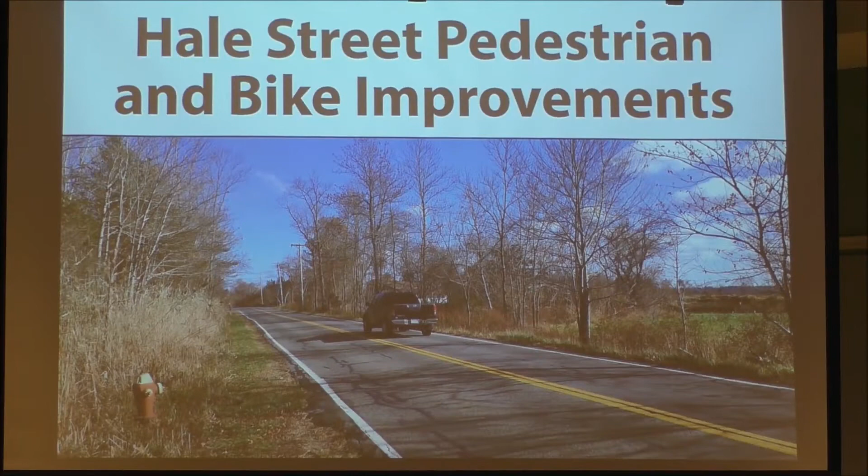You all probably know the road much more than I do, especially its problems, but just looking at a map, you can see that Hale Street is one of only two ways to get into the downtown, and it's really the only potential walkable, bikeable route to get to the downtown and the schools from the west end. This is the area we're looking at: basically 1.7 miles from Turkey Hill Road at the bottom of the map to Low Street at the top.

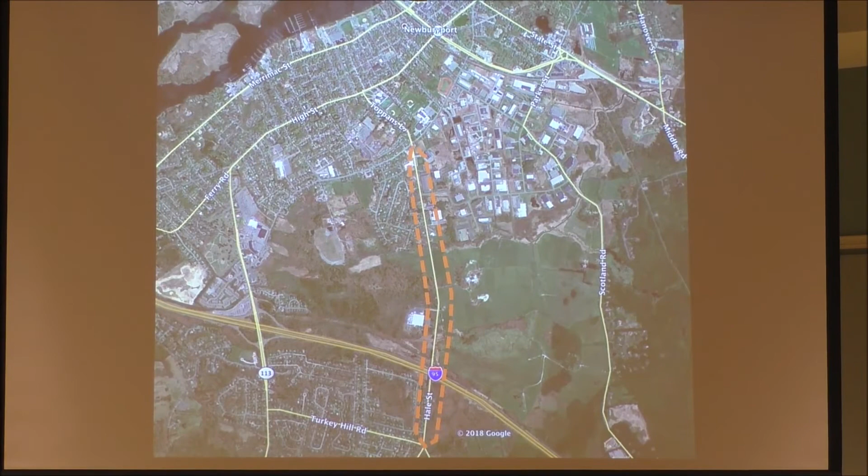One of the interesting things is we have this developing network of trails in the four-town coastal trails area. The system includes off-road trails, shown in blue, and possible on-road bicycling routes. You can see on this map that Hale Street is the way to get from the west end into the downtown area. Obviously, we're not going to promote Route 113 as a primary route, especially for kids.

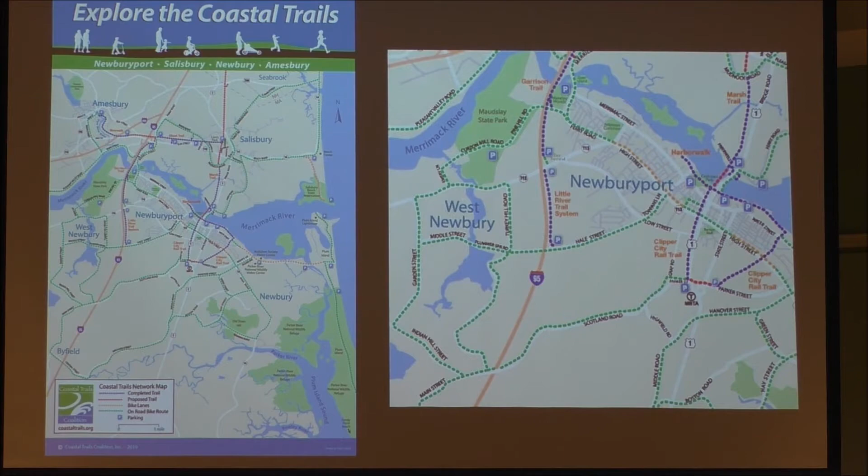The route has a real variety of environments, going from the residential neighborhoods on the west side of 95, through the farmland area by the industrial park, through the Squires Glen neighborhood, up toward the school and Fuller Field here on Low Street, which are really primary attractors for going down that road.

I'm just going to take you through a very quick run-through from Google Earth and Google Street View, just kind of highlighting some of the issues along the road.

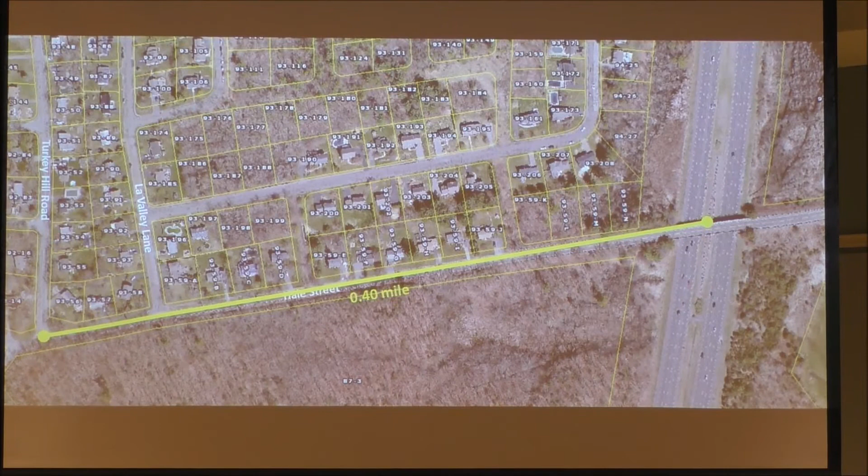The first section is the 0.4 mile stretch from Turkey Hill Road to the bridge over 95. This is the only area that really has a significant amount of sidewalk. It begins with the sidewalk separated from the street with some nice trees. However, the road has really no infrastructure at all for bicycling. It's constrained on the south side by the guardrail and the ditch, so whatever happens here needs to account for infrastructure in that area and how you deal with the guardrail and the ditch. I believe John Eric is going to be talking about that.

As you move closer to 95, the sidewalk gets closer to the street. It's pretty narrow, very constrained by guardrails on both sides. You get up to the bridge, and that's really the best part of the road, the bridge going across 95, because you actually have a sidewalk with a curb, some shoulder, and wider lanes. So it's really the best part in terms of walking and bicycling.

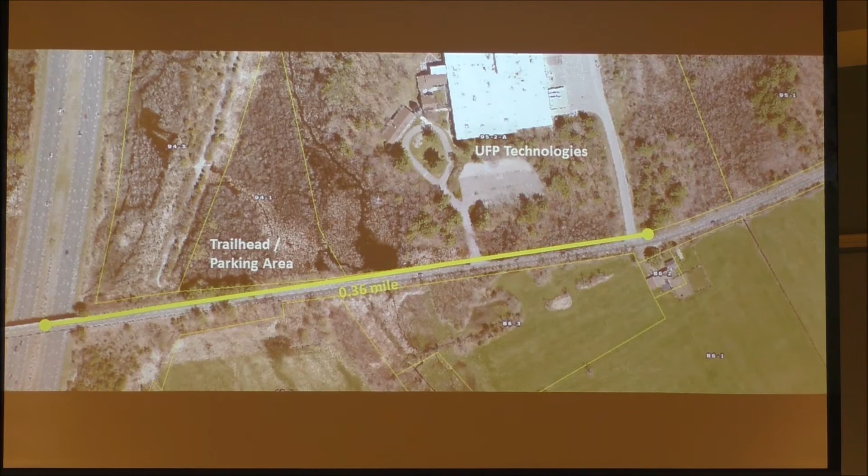Then as you cross the bridge, you come to the trailhead for the Gloria Brownhart Trail and the driveways for UFP Technologies, another roughly 0.4 miles. The sidewalk starts to get overgrown, and then the sidewalk disappears.

You get narrower and narrower shoulders. You've got the constraint of the pond on the north side, some wetlands on the south side. You have concern perhaps about trucks entering and exiting the industrial property.

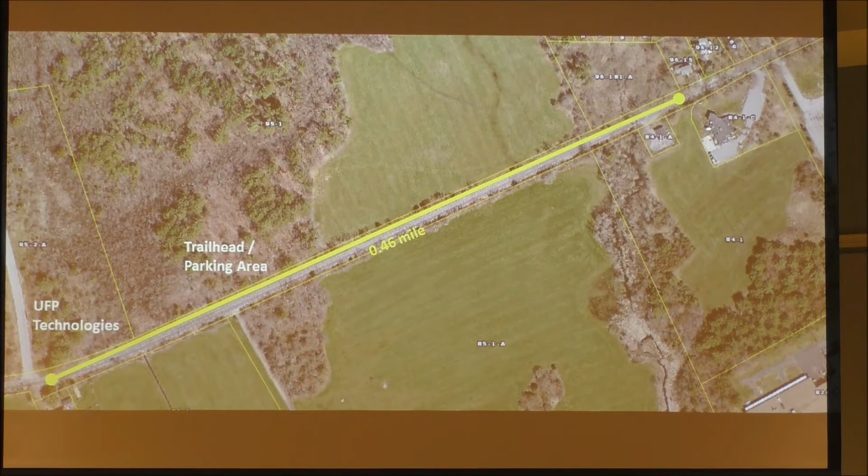You've got a new trailhead and parking area, which isn't shown in this old image here. You've got the recreational conservation area of the North Pasture. All the way up, there's very few constraints in this area relative to some other areas, until you get to the residential areas up by Squires Glen subdivision.

Like you're coming along here, and you get any kind of traffic in this area, there's really no place to move. So it's a place to be careful about. Very narrow shoulders, very beautiful, very nice country road, but very little space to maneuver as a bicyclist or a walker.

And then this next section, now we're getting into smaller sections. There's a quarter-mile section here as we go through the Squires Glen neighborhood, up to the point of the beginning of the sidewalk, just past Squires Glen Drive.

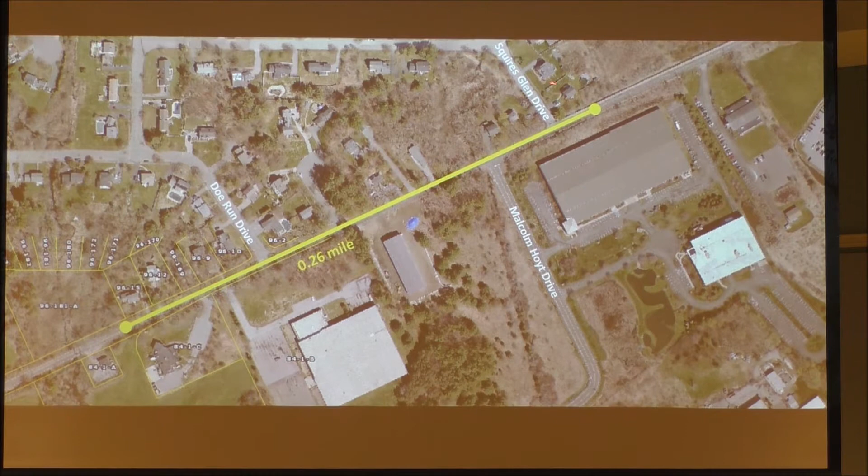So again, we have multiple driveways here. This is an area where there are many school kids in the neighborhood, so an area that would be highly deserving of a better sidewalk infrastructure through here.

And then getting to the industrial park. I think that this is the point at which the traffic counts really pick up, because you have a lot of traffic that is destined to the industrial park or to I-95 via Scotland Road, that kind of adds to the traffic from this point toward Low Street.

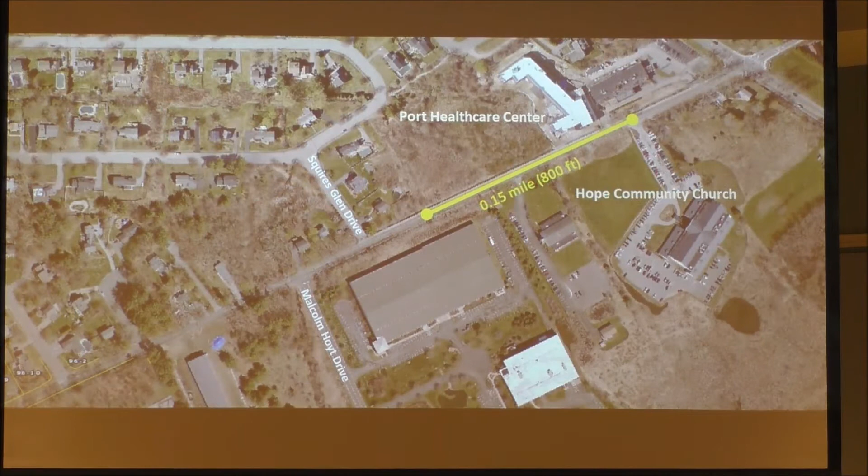And then we come to the end of Squires Glen neighborhood, and we pick up that sidewalk. Another small section here from where the sidewalk comes up to the Port Healthcare Center and the Hope Church. Wetlands again on the north side, wetlands on the south side.

And then that very last area where you've got traffic backed up from the signal and so forth, and quite a lot of traffic in this area. Bring you right up to the corner, and the crosswalk takes you over to the schools.

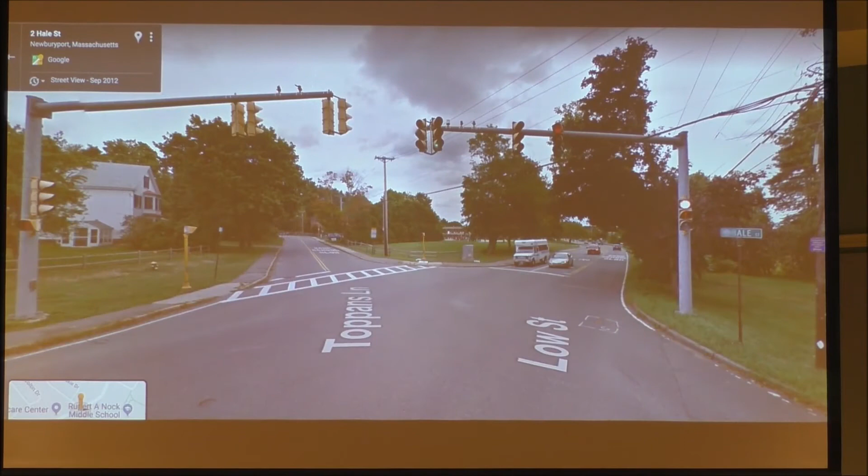So that's just a very quick overview, and now I'll ask John Eric to come up and do his thing.

You guys been talking about this? Oh, no, you haven't. Thank you, sir.

As the mayor was saying, I put this slideshow together during one of our ad hoc committee meetings in 2018. The slideshow itself is rough and tumble, it's quick, but it gets the point across. So we used, just like Rick, we used Google Earth for the street view, and it becomes very effective.

What I'm going to talk about, I just did the first bullet. I'm going to go into the existing conditions real quick, mainly about the road width. It's all about the road width. I'm going to run the Mass DOT design standards by you for those that aren't familiar with Mass Highway standards, Mass DOT standards. Then we're going to discuss some proposed options, and then we're going to open it up. I'll turn it back over to Rick.

So Rick approached it from the west to east. I approached it from the east to west because I wanted to get home, and that's kind of how my brain thinks. So, but I do live on Crow Lane, so I live in your neighborhood. So this project, I'm not going to excuse myself from any meetings. I'm going to be a proponent of it. I really am in support of it, in favor of it. We really need it. Outside of where I live, in my professional position here as city engineer, we need it.

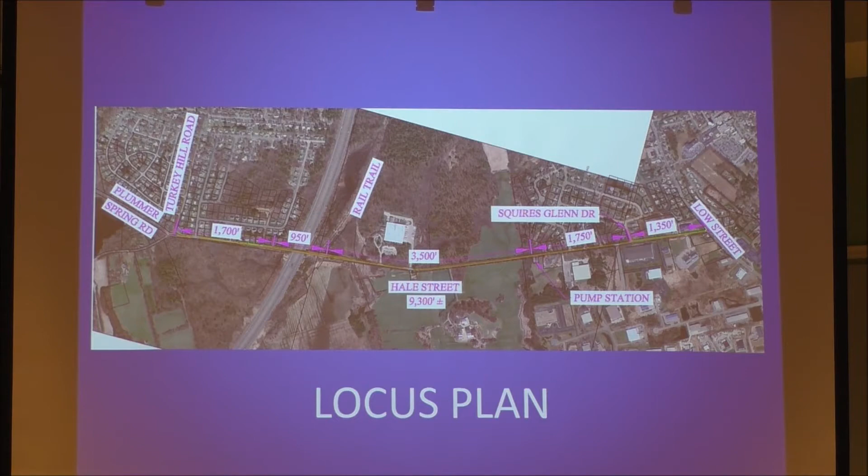The first area is more urban. Then you get Squires Glen - technically the traffic engineers call it a village area, but it becomes a transition between more urban and then you get into rural. Then you go back to a kind of developed rural. So this short stretch, it's not a very long road, it's 1.5 miles, but you do have 3 different cross sections. You talked about the access points.

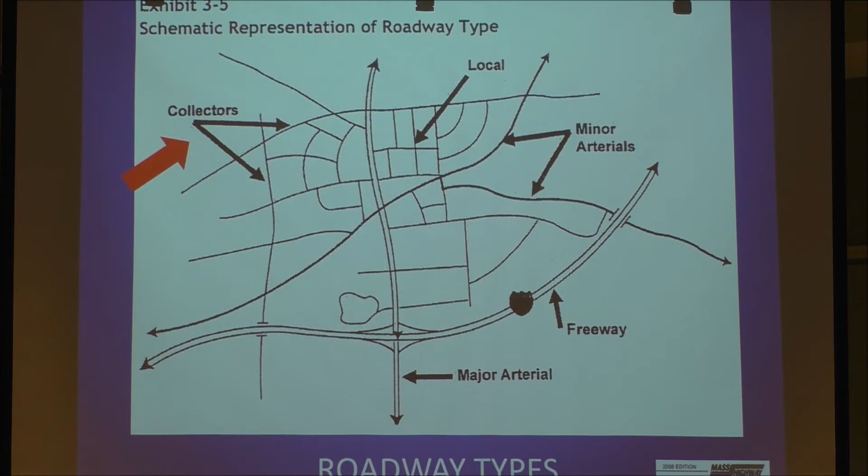So when it comes to highway design, I'm a general civil engineer by trade. I've done plenty of highways, but I'm not a traffic engineer. A traffic engineer deals with numbers, ADT, traffic counts and all that. But I've had enough experience with highway design, so I'll run that by you real quick.

This is Hale Street, a collector. You start off leaving your house locally - this slide is almost exactly like Newburyport. Like I'm right here, this is local, you jump on Hale Street, and then you might jump on Low Street. So Low is like a minor arterial, but Hale is a collector.

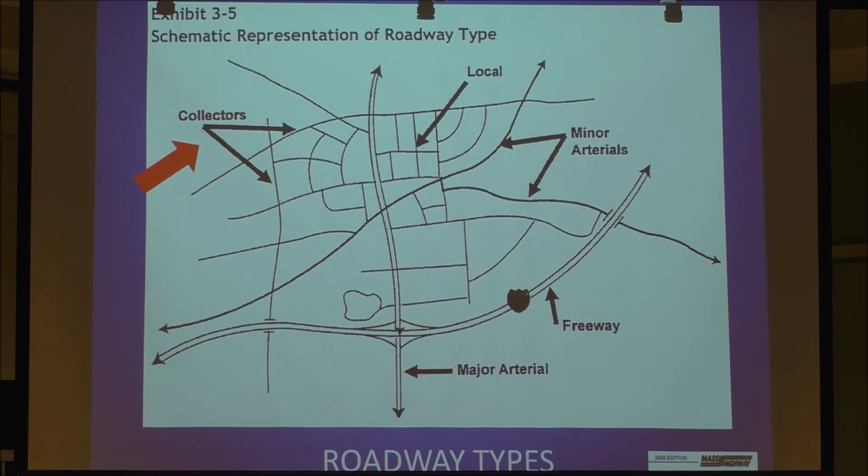And for each one of these classifications, Mass DOT has requirements for widths and all that fun stuff. Enough to bore you - this is one of them right here. This is in case you didn't know it - what's the width of my car?

Your car is probably about 7 feet wide. This is actually accurate for my car. Tractor trailers are 8.5 feet. And the operating width - if you look at the operating width, 8.5 feet plus a foot on each side only gives you a 10.5 foot lane. So when you start talking about lane widths, when you get down to really narrow lanes like 10 feet, that gets sketchy.

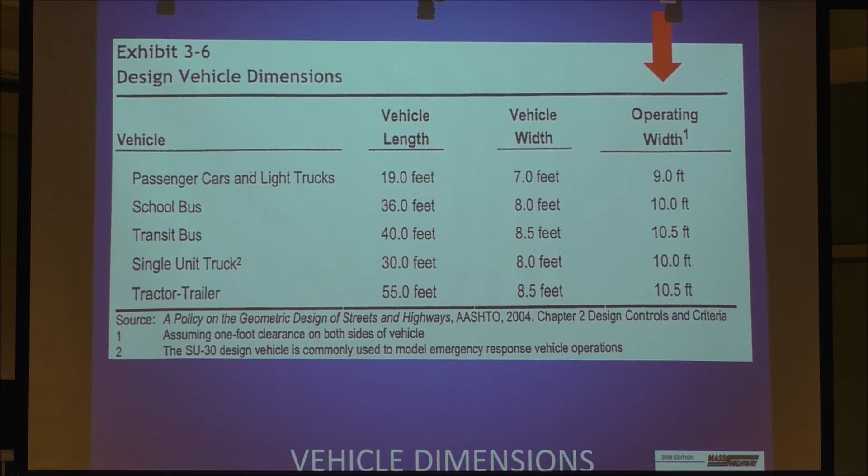So for this collector road, I don't want to go anything lower than 11 feet, and we can talk about that. So technically, Mass DOT allows you - here are the different types, the different types of neighborhoods. Collectors are all 10 to 12 feet.

If this was funded by Mass DOT, which it could be, Mass DOT gives you the ability - they have the minimums and maximums, and they give you the ability to design as you see fit.

For our road, the first section going into the industrial park has tractor trailers, so we do not want 10 feet. I don't like 10 feet for the whole thing, and we're going to get into that - you'll hear my opinion about that as it goes. So I'm going to try to have everyone in the audience concentrate on an 11-foot minimum.

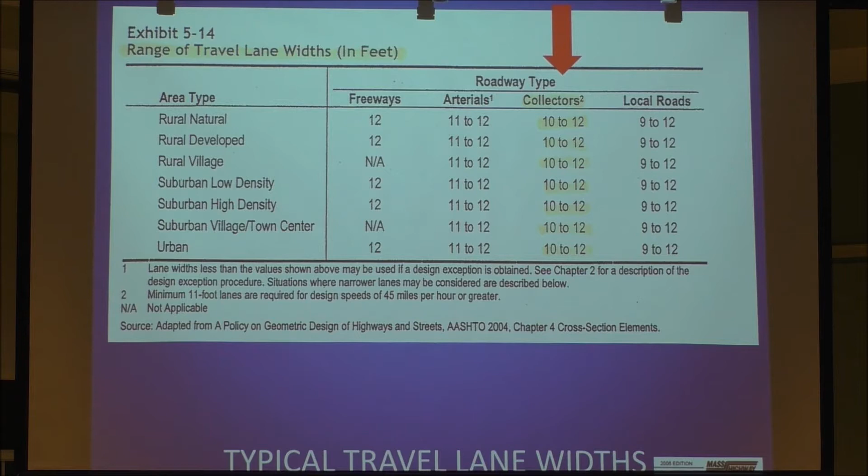And one more thing - for industrial parks, a lot of industrial parks have travel lanes wider than 12 feet. So the asterisk on the Mass DOT design manual has one for industrial parks - so 12 feet, you can go beyond 12 feet.

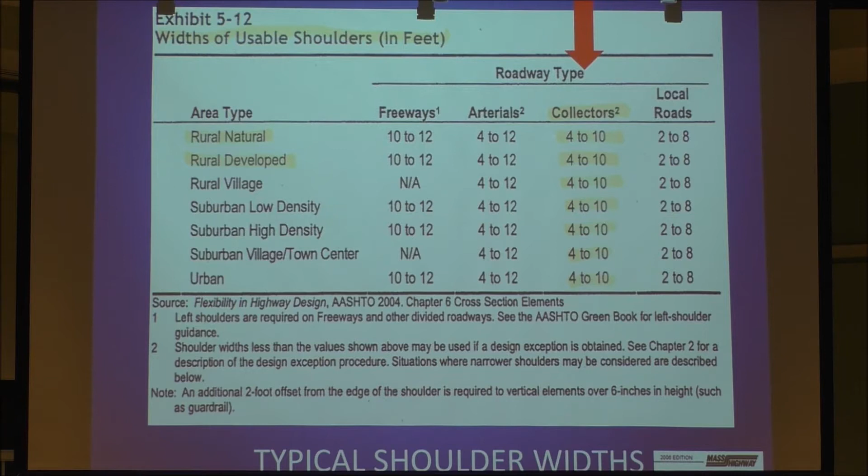Type of shoulders, or the width of the shoulders - pretty basic, across the board 4 to 10 feet. Obviously you can see 4-foot min, 10-foot max. This is the usable shoulder, and then the minimum. So this is kind of a repeat - I'm probably going to have to add this slide.

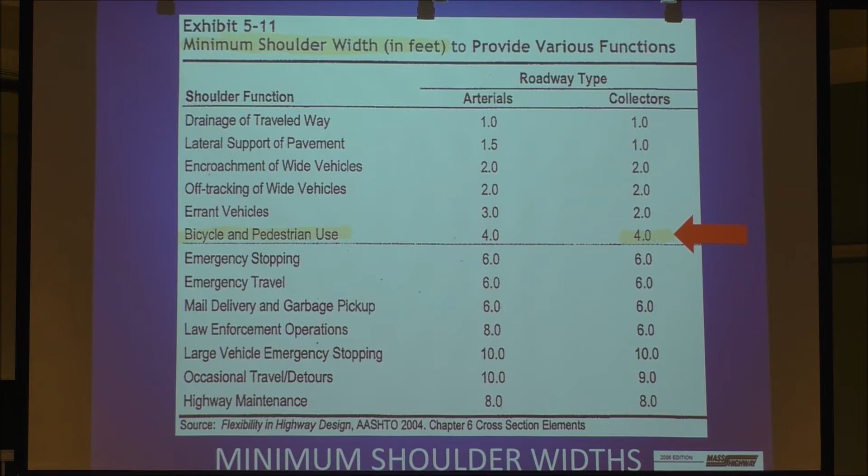But the main purpose of this slide is really the different reasons why you have a shoulder. So this is really our main reason - yeah, a car will need to pull over, but it's mainly for mixed use.

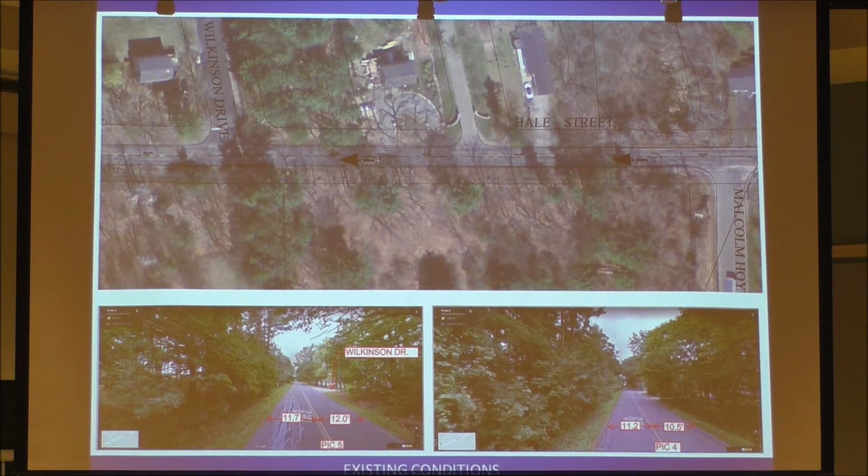Just before you get to the pasture, 11.7 and 12. This particular crossing, I took out, I didn't measure to the fog line. It's not necessary for our project, for this discussion. That fog line is only a foot wide.

Now, one of the driving forces of any project is the environment. So this project will have environmental issues, so we will have to submit a notice of intent with the Conservation Commission. But I assure you, we're all friends with the Conservation Commission chairman, who lives on Hale Street.

Who lives on Hale Street, yes. I didn't say that. I did.

Now, all kidding aside, this is serious. These are not jurisdictional wetlands at the first section here, and there's a definition of what a jurisdictional wetland is. I'm not going to bore you. For this first section, I do feel pretty confident that they are not. So when you talk to people and they say, oh, this road can't be widened because this is wetland, by law, we can, because we are not breaking any laws.

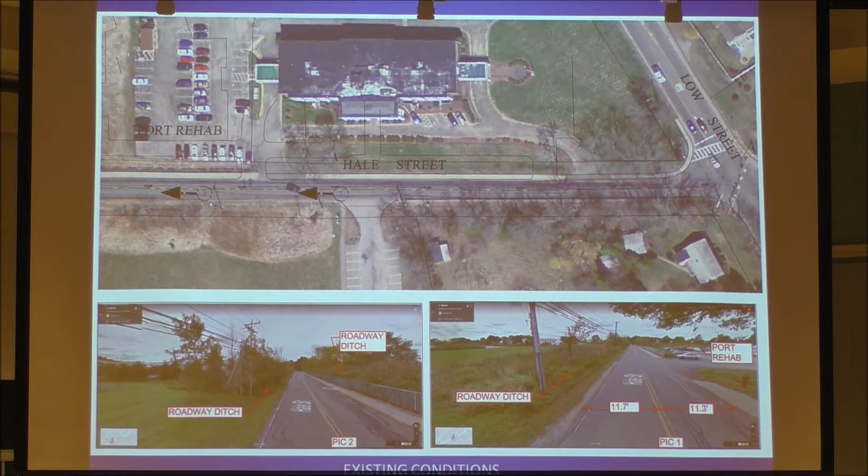When you get out to the pasture, right in here, I cannot say with a straight face that there's no wetlands out here. But I can say with a straight face that we can probably widen to the other side. There's a million ways to skin a cat. So we can probably stay away from this wetland and then widen over there. The only reason for saying this is I don't want anyone to leave here thinking that it's a showstopper, because I do feel confident that we can make it work.

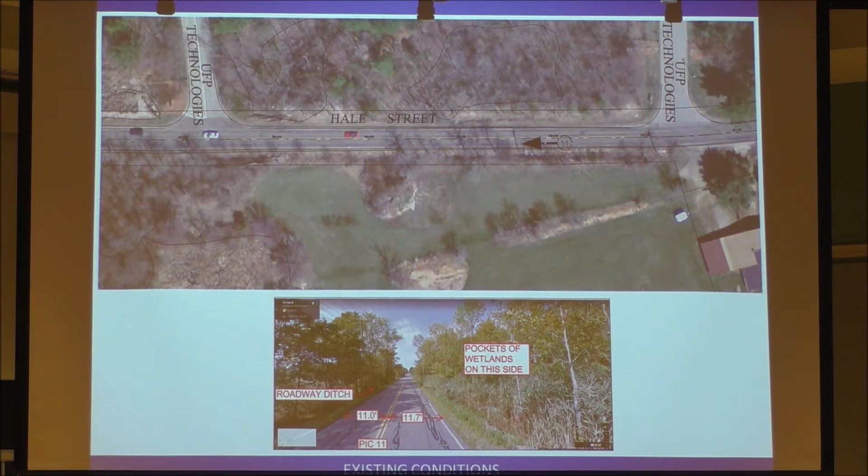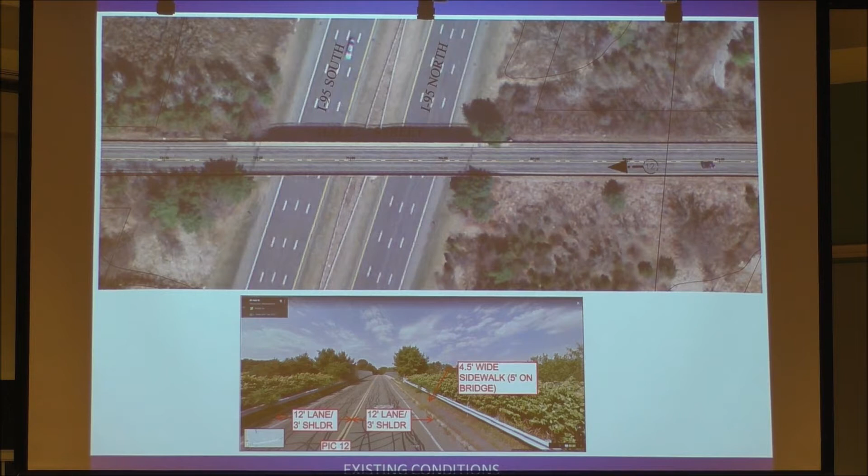As Rick was saying, when you get to the bridge, the bridge itself is 15 and 15, so it's 30 feet curb to curb. And generally, that's what we're proposing, what we're recommending for this cross section for the whole corridor, 15 feet for each direction. As you know, when you get to the other side, it gets narrow.

In here, this is a ditch, and for those that are very familiar with this, this guardrail needs to be repaired. On the other side of the ditch is a stone wall. So we have to be careful with stone walls. By law, you can't relocate so many linear footage of wall. You end up triggering a MEPA finding. We don't want to go there, we don't want to touch that.

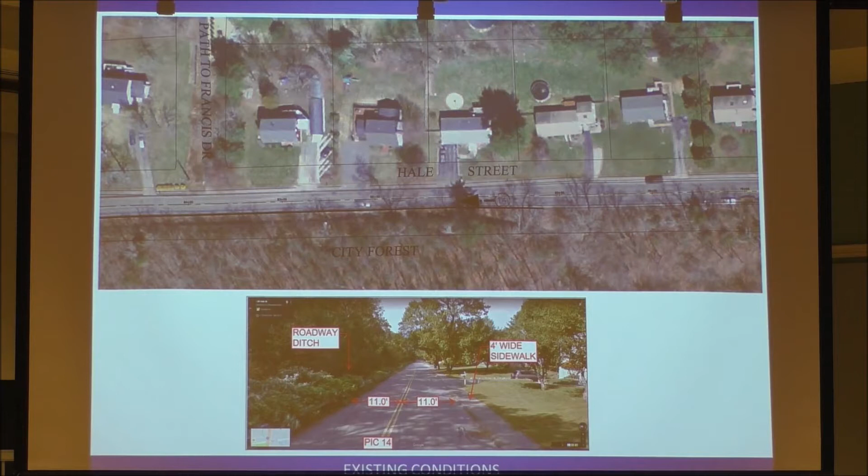But I'm trying to come up with a clever way to widen without impacting the wall. We could possibly go to a closed drainage system, but we'll worry about that in a minute. So the possible solutions, really, at the end of the day, we're here to hear any ideas that you have, because everyone has an idea and we're human. I see one option. I put a second one because you can't have a presentation with just one option. So I am open-minded.

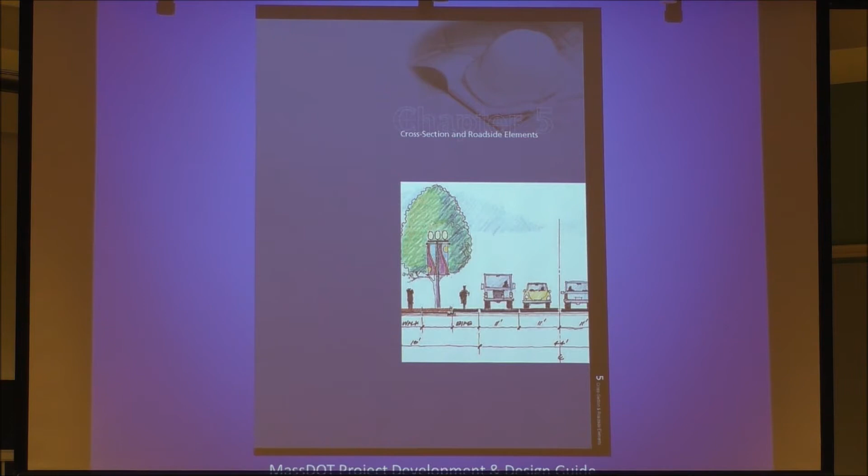This is the MassDOT design manual that we use. So case one is everything separate - your travel lane is separate, bikers are separate, and pedestrian. Pretty self-explanatory. When you're separated, and then if you need funding from MassDOT, technically a bike path is 4 feet wide without a curb, but the minute you have a curb, it's got to be 5 feet wide. So those are the minimums for MassDOT.

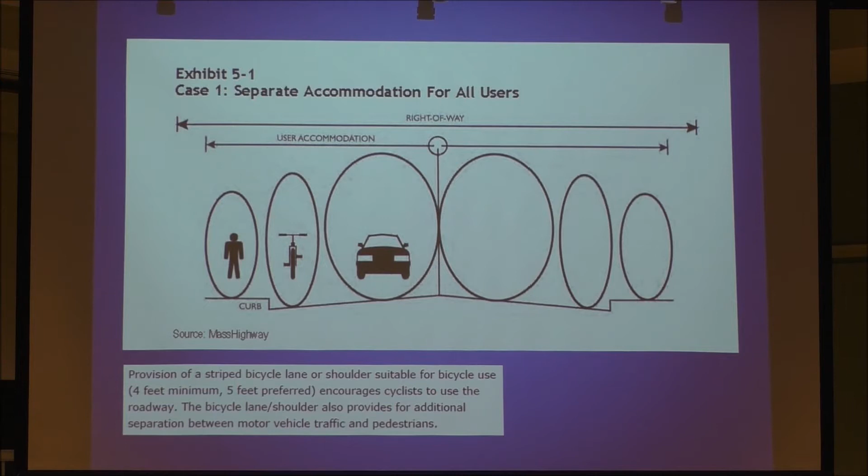And even MassDOT allows a little gray area, so they call it case 2. The gray area, case 2, accommodation may require design exceptions, indicating that the road is shared between cyclists and motor vehicles, are appropriate.

I was trying to find the exact wording, but essentially, if we get funded by MassDOT and we do say 11 and 4 - 11 feet for the travel lane and 4 feet for the shoulder - it's not really a bike path because it's 4 feet and we have a curb. They may do a design exception, calling it a case 2.

Worry about that when we get into funding, not about putting names on our lanes. That's what I like about it - for anything we do locally, the most important thing is safety. Classification is often dependent on who is the funding authority, but as long as it's safe - whether you call it a bike lane or a shoulder, if it provides the same function, I don't get hung up on names.

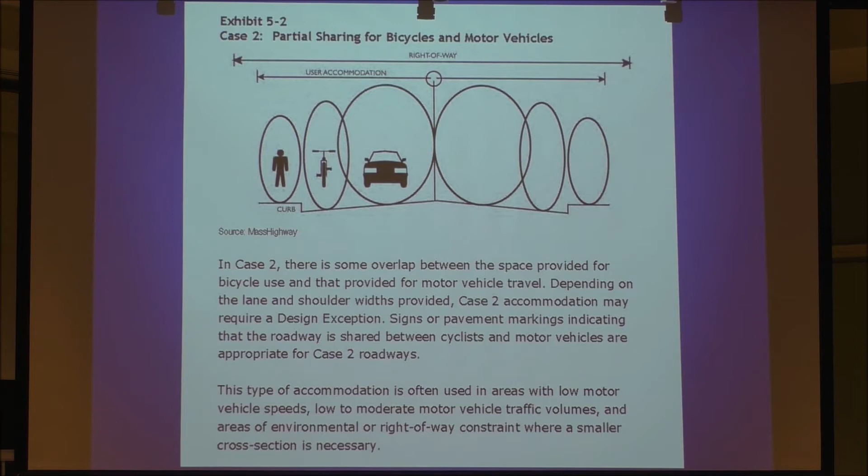Case 3 is shared, kind of like High Street - you have the shared use of travel lane and bikers. So before you approach that, driving, you'll see a chevron, two arrows. That's your indication that you're turning into a shared use.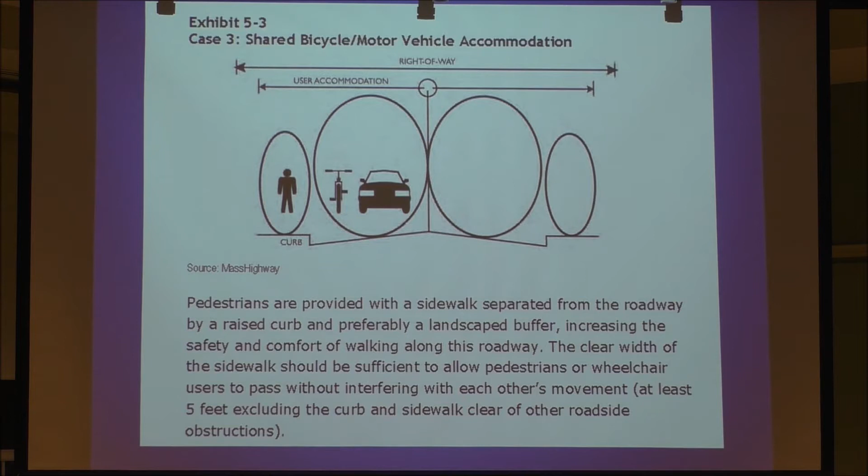Am I going too fast or too slow? Okay.

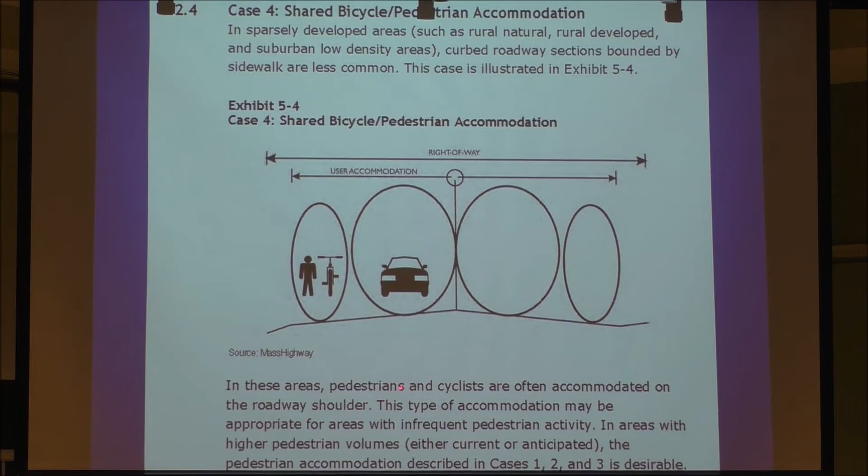Case 4 is an option that we propose. It's separate mixed use, and this is exactly what we have where there's no curb. And then we have shared for all of them.

This came up, it's coming up in a lot of other countries. Rick and I talked about it at one of our meetings. It's got its purpose, but not for a collector - this will have a purpose for like a local road. It'll have purposes that I can't come up with an example right now, but definitely not for a Hale Street.

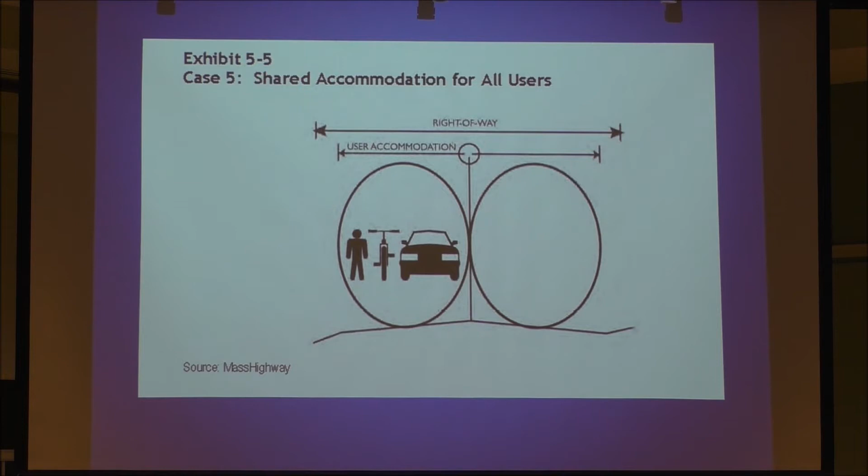So we're proposing 11 and 4, like I was saying, and then we'll have a curb and then a sidewalk. I like this - 11 feet accommodates a lot of different vehicles. The 4 - the whole purpose of 11 and 4 instead of, well how come you aren't doing 11 and 5? Well, it's all about the money. So we're trying to keep this as narrow as possible, and every foot adds a lot of money.

So right now I'm starting minimum. I could have easily went to 11 and 5, and then you get yourself an official bike lane and everyone's happy, except for the city who doesn't have the money. So 11 and 4 is the minimum that we're proposing right now.

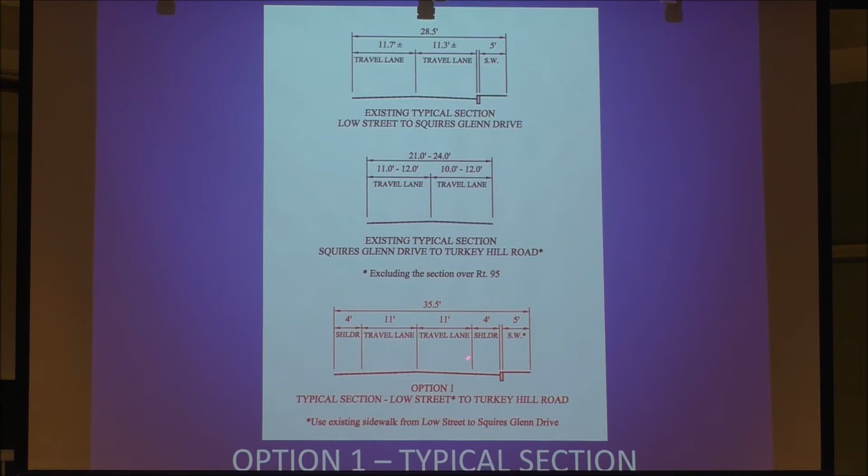And this is just what it looks like. So we went out there, we measured exactly where the photo's taken right here. At the end of these lines, we measured exactly the width of the road, exact. And then from this layout, we put it into AutoCAD.

So this is actually - unless we had a last minute change with some text, which we did - but this is generally very accurate. So we should be able to widen from the curb, leave the curb, put the 4-foot shoulder, 11-11, and 4-foot shoulder without moving that pole. That's the main purpose of this, is when people say well how much infrastructure do you have to relocate? Should be pretty accurate. Final design, we'll find out.

There's also design standards for distance from - there's safe zones for outside of the shoulder before you hit an obstruction. So this, my gut feeling would be fine, Mass DOT would be fine with it for a local minor collector. It wouldn't be for an arterial, because I've already designed arterials - you need about 5 or 10 feet, depending on the speed.

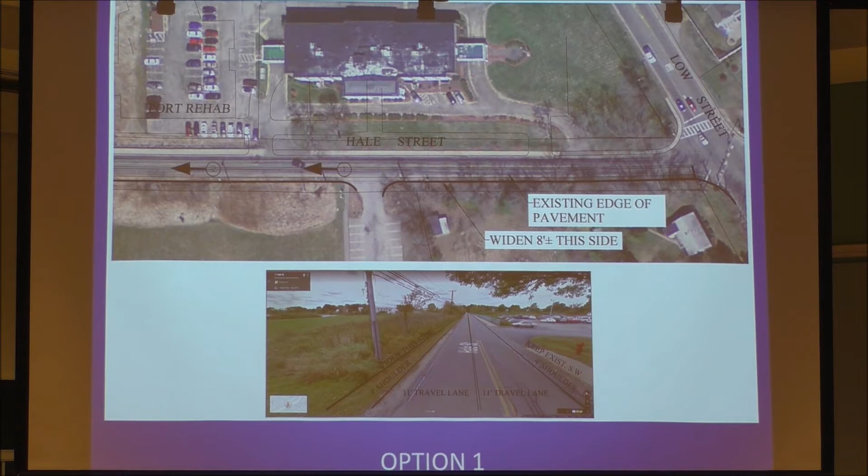So this, we should be able to get away with it. Sounds like a detail, but if we have to move all these poles, it gets expensive. 11 here is very important because of the tractor trailers. This is pretty much saying the same thing - keeping all this, moving out here, and trying to stay within the poles.

The ditch can move. So in this area, this line right here is the right-of-way line. That one right there - and right-of-way, that's the right-of-way. When it comes to streets, the right-of-way is the property line, the public way - that's the official property line owned by the municipality. Private property is called private property, that's called the property line. This is the property line, but it's called the right-of-way.

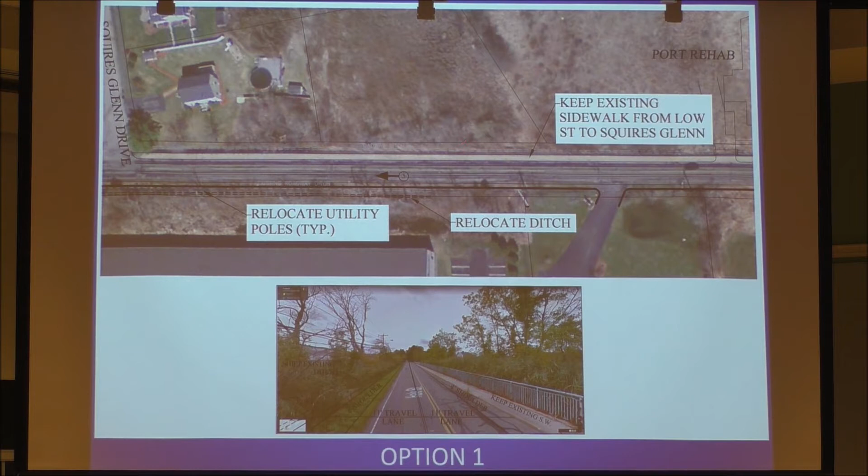So we should be able to do everything in the right-of-way, and that's important - no takings, no permanent easements, things like that to deal with. Apparently, our initial assumptions - there's no area that I see that would cause us to have any problem with widening within the right-of-way. And that's good.

Pretty basic here. So here, you split it down the center of the road. Just add, widen it to the right and widen it to the left. Pretty basic, and that can change.

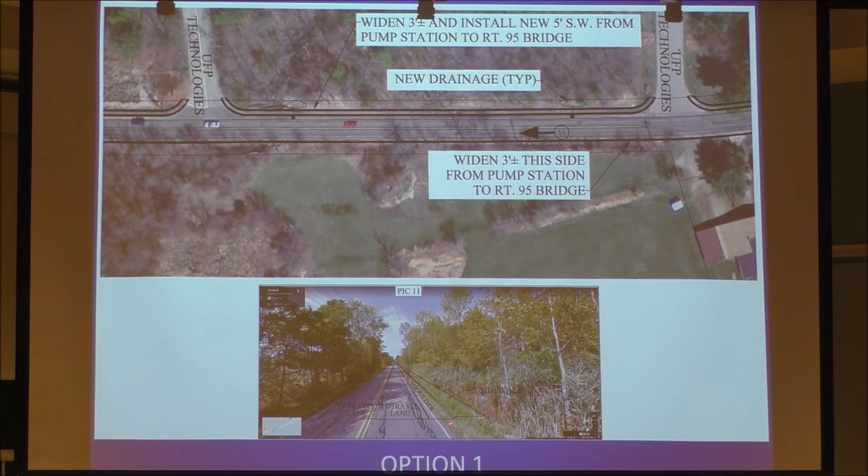If we need to get away from the wetland, this didn't get away from it. I was trying to be aggressive because I knew Joe was going to be here. But realistically, I'll take it back a sidewalk and move it over here, then push everything that way.

Here, it's pretty straightforward. You just maintain the same curve. Here, this is where you work with the neighbors.

Anyone that lives in these houses, you don't have to raise your hand or identify yourself that much, but I assume there are. Anyone that lives here, whether you know or not, your property, the right-of-way is probably further back than you thought.

That doesn't mean we're going to be sloppy and take your front yard away. That's not how we operate. We mean that for our department. We'll try to push back as far as we can into here, but the minute you start moving a wall, then you trigger MEPA, and MEPA is Massachusetts Environmental Policy Act. So it causes all kinds of problems.

So that's that. The good news is, not to worry, it shouldn't be that much of a deal. But the city can take that land without permission? Is that what you're saying? Correct, because it's already our land.

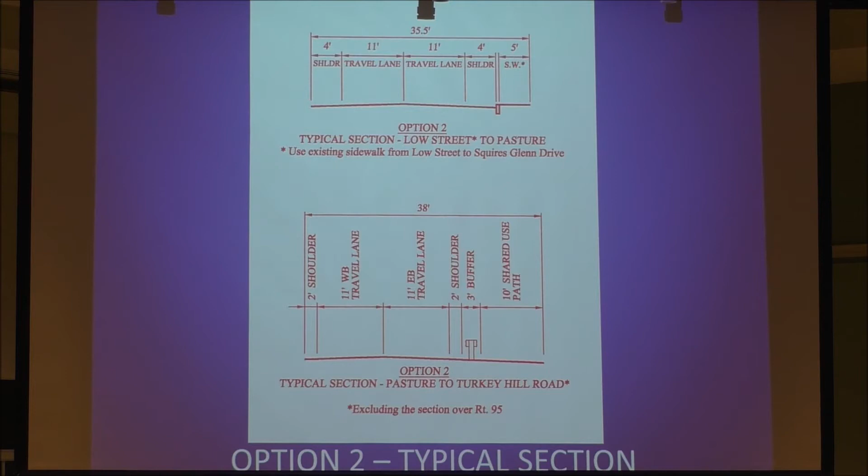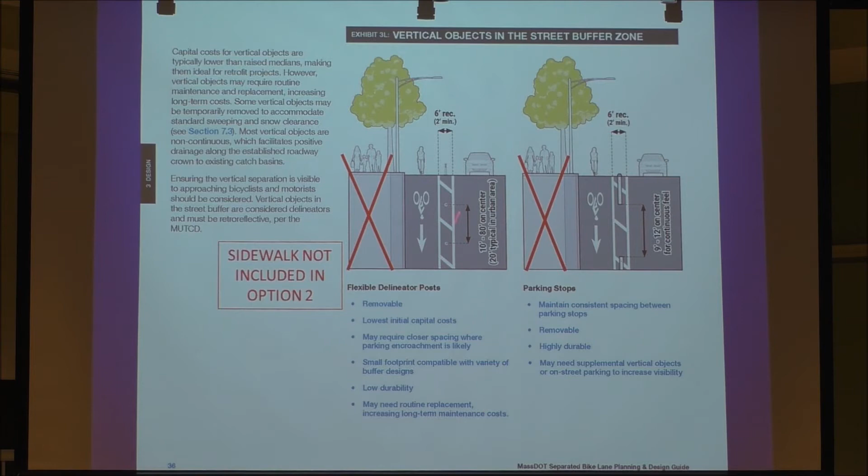So when you have a travel lane and then shared use, you need some kind of striping, preferably some kind of delineator or removable barrier. These aren't going to stop a car. Everyone's starting to see these all over the world - essentially they're nothing but a stanchion, these plastic things. There's a million ways to skin that cat, but essentially, all this drains right off.

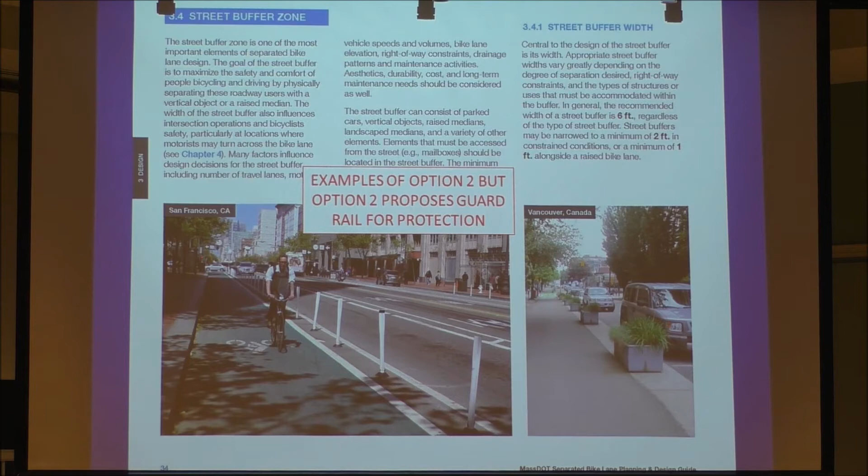So this is the same from Low Street to Squires Glen. Here, in this section, it's the same because this is more of a neighborhood area where I personally felt the sidewalk would be a better fit.

So as you can see here, once you put in a curb, you need drainage. That's what the square is for - catch basin, circle for a drain manhole. I know the top of the hill is up here, it comes down. I put a basin here, two basins here. It'll drain here and discharge into this ditch. So this is pretty routine design.

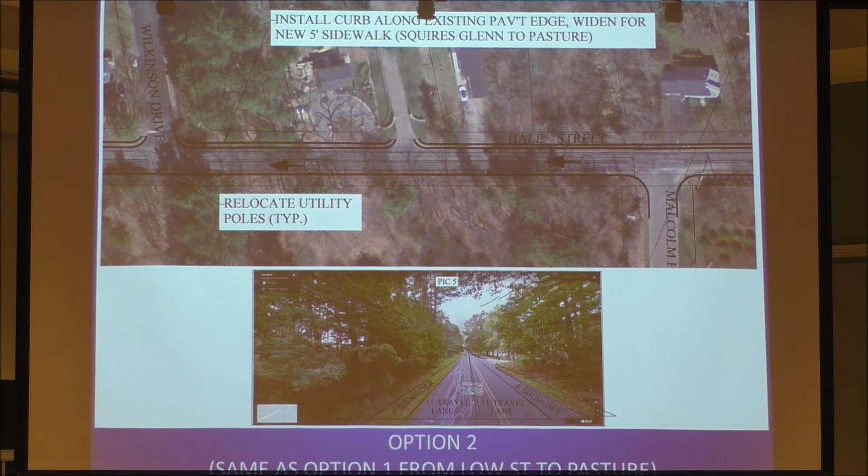And I think this is a better look for this neighborhood with the sidewalk, versus what we're about to get into with that.

So this is the transition area here. Essentially what you have is curbing - that thick line is curb, and the back thick line is the back of the sidewalk. So there's the sidewalk there. You transition from that cross-section to a narrower road. So over here, it's 11 and 4 with a sidewalk.

But then when you get to here by the guardrail, it's 11 and 2. So when you go from here to here, this area, in my opinion, cannot work. Why? Because a mixed use, whether you have a yellow line down the middle or not, is two-way. You go from two-way, and you're a biker heading outbound, but here you're approaching someone heading towards you. So how does that work?

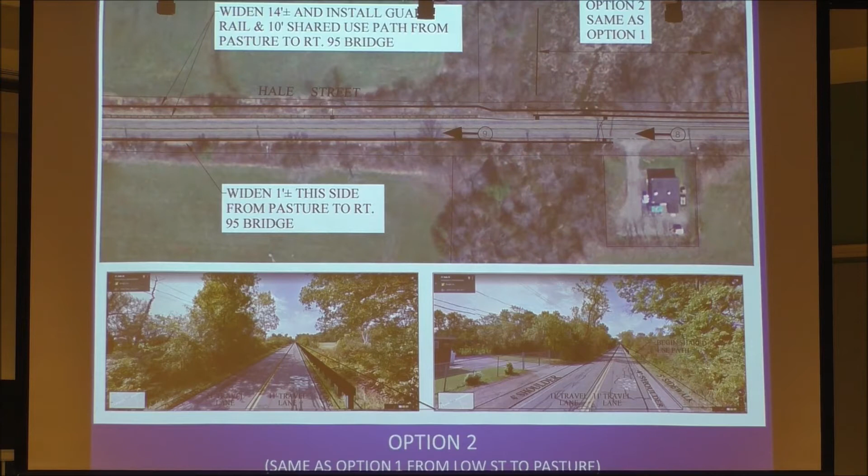It doesn't. But I wanted to show this because in the area up here, imagine that everywhere. This in and of itself would be fine if it began and ended like Low Street or Turkey Hill. But it doesn't. So I don't like this at all. This is where, once we get into design, we can get more creative, but as of right now, I don't see this working.

Most bikers are gonna stay in the road, that's fine. Most bikers going the other way are gonna stay in the road too. But there's still gonna be people that are confused, they won't know what to do, and there'll be a head-on collision there.

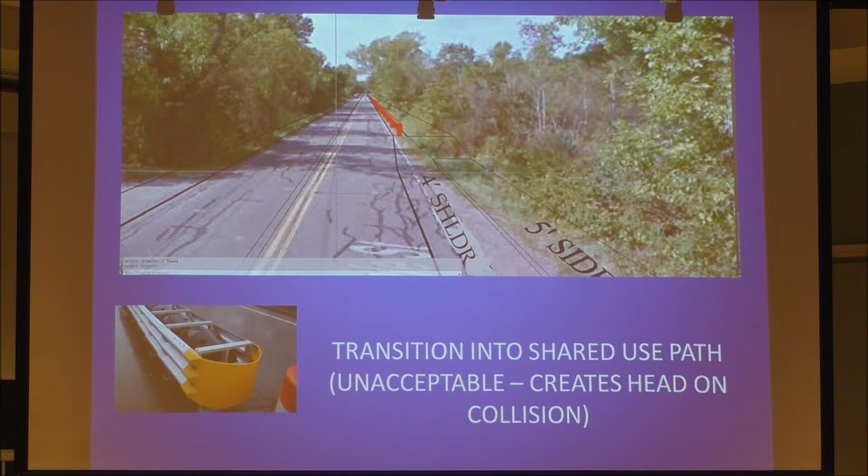The other problem I don't like about the guardrail is it breaks up the ability to pull over on the side of the road. How do you pull over when you've got a guardrail? This whole area is beautiful, and I'm not saying people just pull over, but look, some people do - you check things out.

But there's an opening there for, I think it's Jerry Matt's property - sorry for using names, but I think he uses it for plowing. He goes in there and hays the field, mows the grass, and this is his entrance point. So we need to maintain that. But essentially what we're doing is telling private property owners, hey, we're putting up a guardrail, so whatever you want to do to your property, you can't. So I don't like that. I don't think that's fair.

So at the end of the guardrail, how do you pull in? You pull in, and when you pull in, you've got to make sure no one's coming this way. This is a big open area, that's fine, so you can see people coming towards you that way. But when you pull in here, you're crossing a bike path just to get to the trailhead. I don't like it. I don't know what you guys think - I'm very opinionated, as you can tell, but I don't like that.

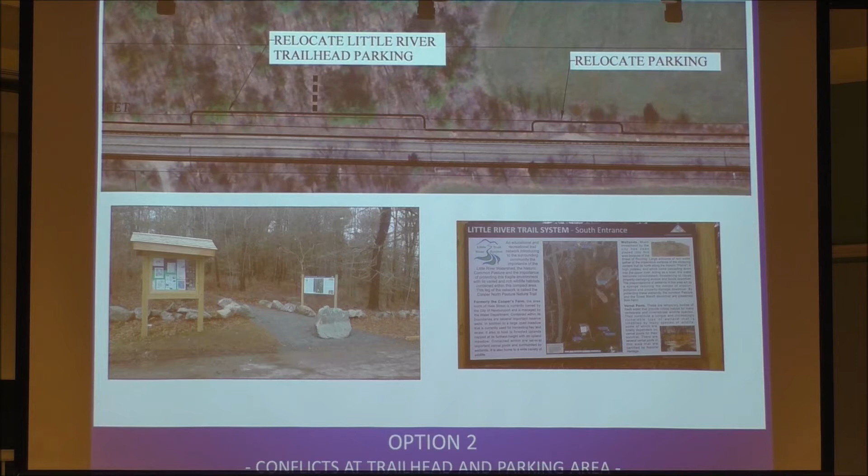So to me, it's kind of hard. And then here you go back to what I think is more appropriate. Again, this is subject to change - you guys could do it, the city could choose shared use here, that's fine. But going from here to the bridge, we don't really have it shown, but you'd go from a bridge with a sidewalk to a shared use to Turkey Hill. A short stretch of shared use is dysfunctional because you've got people going both ways on it. So I think it's more appropriate to have a sidewalk in this area.

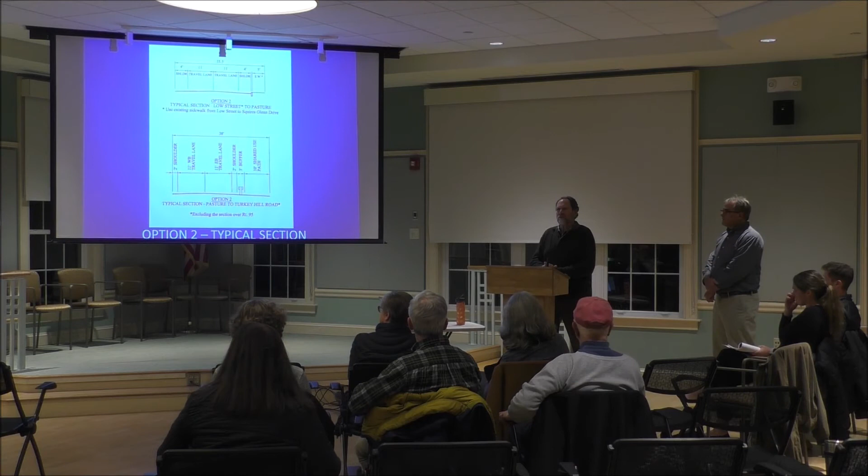But is it true that if it's the diagonal painted line kind of separation and then a shared use, even a two-way shared use lane, that could all be plowed? It could all be flat, but that's the problem with the speeds on this road. You really want to have some type of vertical separation because right now we have nothing. Yeah, I'd rather have something than nothing. And I'm just concerned because currently if we have a sidewalk, there's no residents to be shoveling that, so it could be covered in ice till May, which would be a huge bummer.

Yeah, I want to talk, hey guys, I want to talk about the speed though, right? I want to address, Rick, everything Rick said is 100% accurate. This is the biggest problem that we had internally going back and forth. This is the center of the road. It slopes from the double yellow to the edge. We all know how roadways drain.

This does not work for many reasons, because this is where the snowbank is going to be. You get a springtime rain and all that flow will get blocked by the snowbank. So internally we were poking around with super elevating the other way, having the guardrail be the high point, having all that drain to the other side of the street, so there's no blockage after a rain event in the winter, which does rain in the winter. So the super elevation doesn't work.

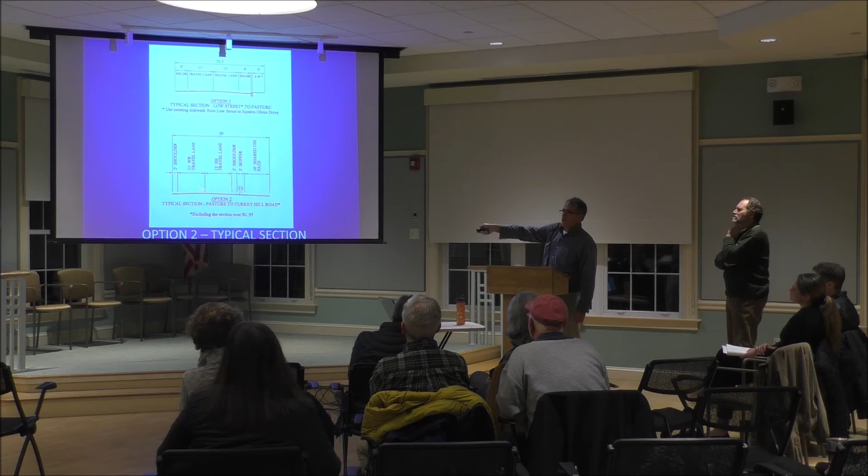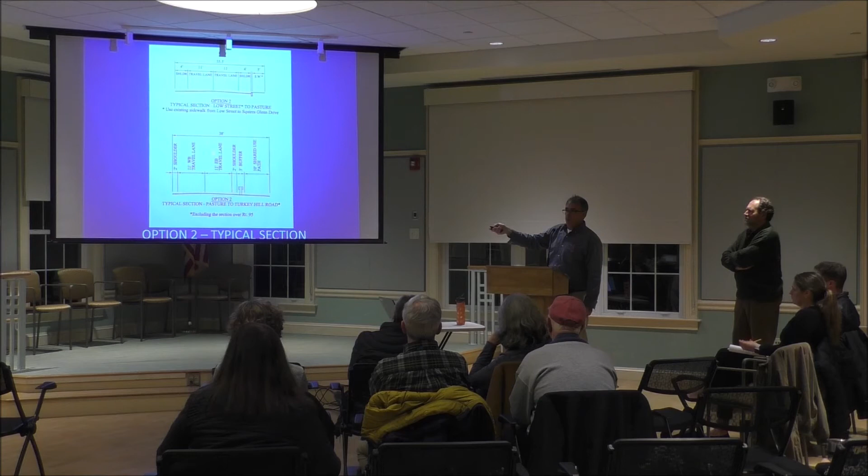Why? Because if you have a snowbank here, when you plow the shared use path, and you have a snowbank here too, then all that snow melts and freezes across the travelway. When you enter a highway and the ramp is super elevated, you'll see sheets of ice. Not a big deal because they put so much salt down. I don't know an engineer that will sign off on this, and I don't like the idea of super elevating that. With this cross slope, I don't know a DPW crew in America that will remove the snow between each guardrail post so the drainage can go through. That's why I don't like option 2, for many reasons.

That's another one. That's a fantastic question, because that's the fundamental problem we have finding something that works without a curb. It's so hard because of the added width of asphalt we're dealing with.

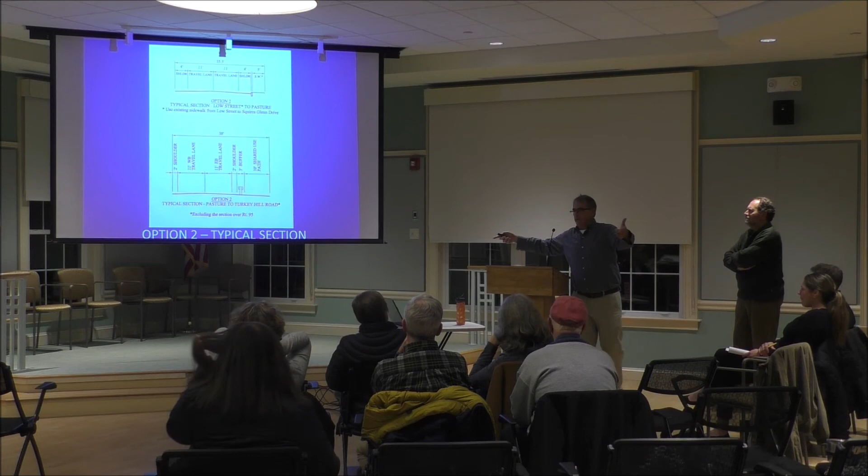Oh wait, Jim. Yeah, so we keep talking about the speeds, right? The speeds on both ends are 25 miles an hour, and the speed in the middle of the straightaway is up to 35 miles an hour. And if that was effectively enforced, we wouldn't have the perceived safety issues of the separation we're talking about.

I still disagree, because you still want to design it for reality, not whether the police are going to enforce it. Let's reverse it - think of your kid. Okay, the police weren't there to keep the speed down, but your kid got hit because the guy was going 50, and you didn't have the right protection. I can't live with that.

Me being the engineering department, yeah, that's what stamps it. So, technically you're right, that we should... yeah, technically you're right, you're absolutely right.

But the counter argument is, today they've got 6 inches on the curb, they've got 6 inches on the fog line, and that's all they have. So what I think a lot of people are trying to get to is, how do we get to a 4-foot shoulder today on both sides, outside of the fog line? There might be a longer-term plan for a different design. But I've got 6 inches on both sides of the fog line - how do I get to 4?

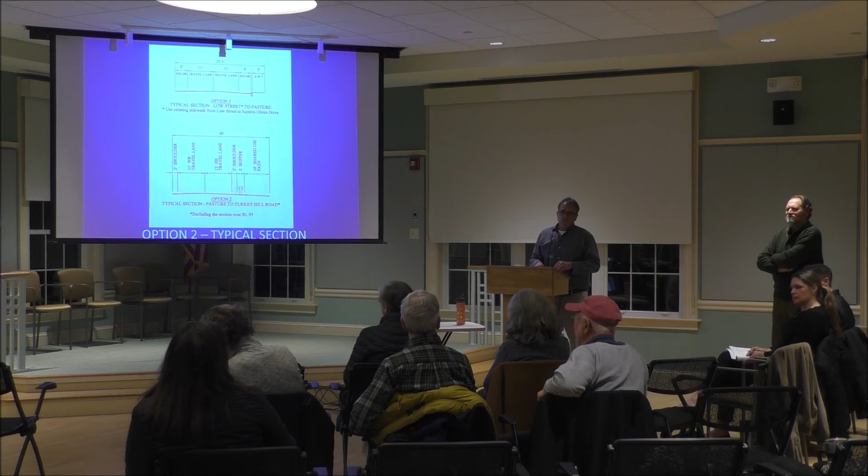Listen to this man, because everything he said about Hale Street is absolutely dead on right. And I know you can't control the speeders, but if you're going to plan this, all I ask as a taxpayer and a resident is do it so it's multi-use, so a cyclist has as many rights as a runner and a child on a bike or anything else. I know you have to look at cost, but do it right the first time and get it done right, so we're not back here in a few years saying it's a mess again.

Yeah, I absolutely totally agree. My biggest concern is the infamous stereotypical mom with a baby carriage.

The person with the baby carriage, whoever is pushing it, I worry about it. So how do we make that work without a curb? I'm pulling my hair out.

America's not ready for a separation. We will be open, I swear, we'll be open to look at it. I'll be pleasantly surprised if we can make something work without curbing, but have the ability of having the carriages way over on the side.

Well, the problem is, I'm not against it, for it, but I hear you guys aren't going to slow the traffic down. It's a responsibility of the drivers, it's up to them. And unfortunately, as you pointed out, sir, it oftentimes doesn't work.

But you know what? I'm as important as anyone pushing a baby carriage, and they're just as important as anyone cycling, and on and on. Everyone is equally as important to be safe on these roads, and we're all paying taxes.

So all I'm asking is please consider doing it so it actually includes runners and cyclists in multi-use, as much as somebody pushing a baby carriage or a child going to school, who all have rights and should all be safe. But everything you said was right. Thank you. Yes.

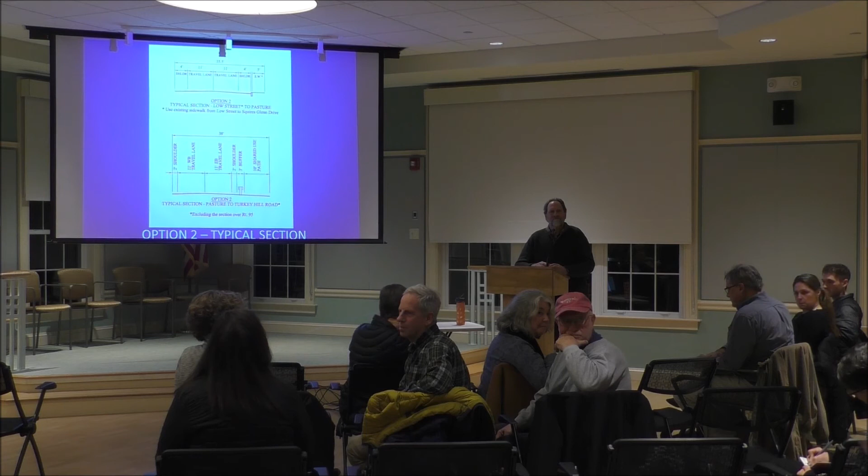And so these types of conversations are good. My point is, you've got kind of a commitment here from the councilors who surround Hale Street, that we're trying to do something. We know there's a problem here. I walk it every day, so I get it. I don't know that there's going to be immediate action like next week, but it's top of mind, and we're trying to make it done in this legislative year, to at least have some sort of idea where we're going to go with this going forward. That's all I can say.

That answers a lot of questions. Thank you. Is there a point person or email set up for this, to send information?

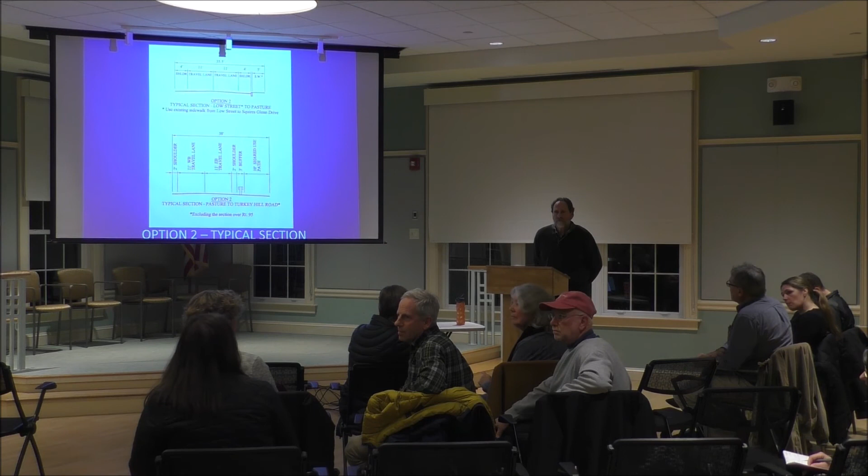For some other areas, even in the United States, they've done away with sidewalks and created an equal shared space, just through delineation of the land, so you can widen the space, which eliminates some of the costs. I can definitely send some stuff. You can certainly contact us at Newburyport Livable Streets, and we can do some research for you on that. It depends on the kind of road, the volumes and speeds.

She has examples to share with us. Oh, I see, okay, sure, that'd be great. I don't know if it would be applicable given the topography, but sure, that'd be great, it depends, a lot needs to go into it. That's what we're here for. If you're here, send them over, I thought you were asking for it. I asked earlier to see if you had done anything, but I haven't really looked. Good, that'd be great, take a look at it.

To address the speed issue, can speed bumps be added? Not on the collector road. It can be done on local roads, but not on a collector road like this.

You guys mentioned this is by state law? I don't know if it's by state law or federal standards, I'm not sure, it's a safety action. At least for a collector road, it's not appropriate. Purely by the classification, this is a collector, the cars need to move. On local roads you can put a speed bump, even locally you don't prefer to, but you can't put them on a collector. Whether we like it or not, this is a collector, it's not a local road. So you can't make a collector road one-way on part of it either.

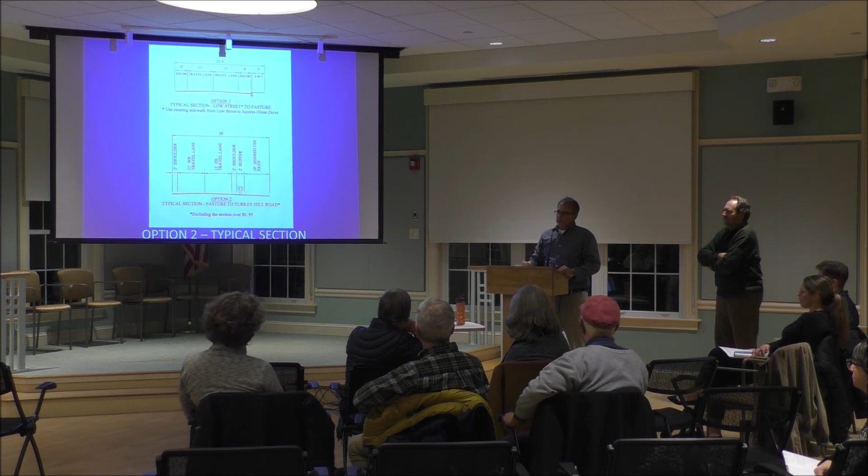Since Europe was mentioned as an example, that's how they slow traffic down, they don't have a separate sidewalk for pedestrians, they have speed bumps. Yep, and I've traveled over there, I just got back from Finland with my daughter for a week last February, picture after picture. We went from Helsinki to Rovaniemi, in the Arctic Circle, all the way up, bike paths on the side of the highway the whole way. You could do a bike path from the Arctic Circle to Helsinki, about 1,000 miles. It's insane, we are so far behind, it's not even funny. This town has too many different sections where anything we want to do that's European doesn't quite fit, because you've got the urban downtown by Squires Glen, and then the open pasture, which is kind of what you're talking about.

That would be perfect for the open pasture, opening it up. Rick wanted to look into a gravel walk behind the ditch in the pasture. Yeah, you could, but then you're buying the private property's land. Otherwise it's a fine idea, but it's only a fine idea for about 500 feet. Before and after that, you're back to reality. So European ideas can only go so far on this road.

So I guess that wasn't in reality, is that what you were saying? As far as that ditch? Yeah, that's okay, he's the engineer. Well, you gotta buy the land. You can do it, but you gotta buy the land.

I was wondering, it sounded like some people were interested in just widening the road, so if we did just the 4 feet widening, is there any restriction as to what could be installed afterwards? Like would it make it harder if we paved the 4 feet and then later wanted to add a 5-foot sidewalk? Would it be hard to do that afterwards because the roads would be different heights? Yeah, it's probably, you could theoretically do it, but once you think about a sidewalk, then you're talking about raising the road and so forth. So you'd really be paying for it twice.

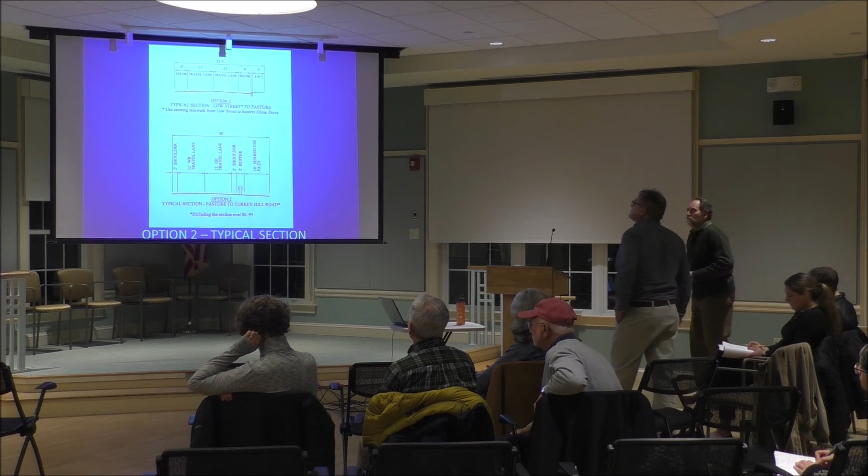Mr. White, again, is there a version of the top option there where we lose the sidewalk and we add buffers between your 4-foot, hopefully multi-use areas, so that we don't need those silly stanchions which everyone sees just get mowed down and broken — they're ridiculous anyway. Is there a version where if we don't have the sidewalk, we do a simple widening, the water pitches the same, the water runs the same way it does today? Yep, with the buffers added between hopefully the multi-use path.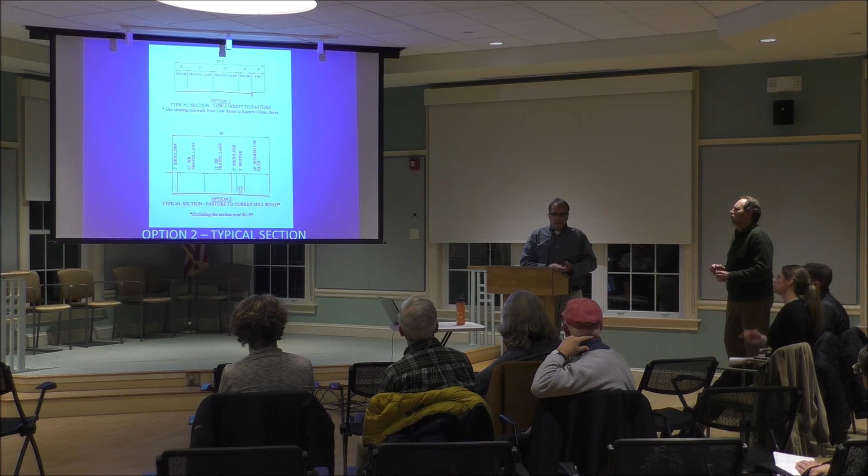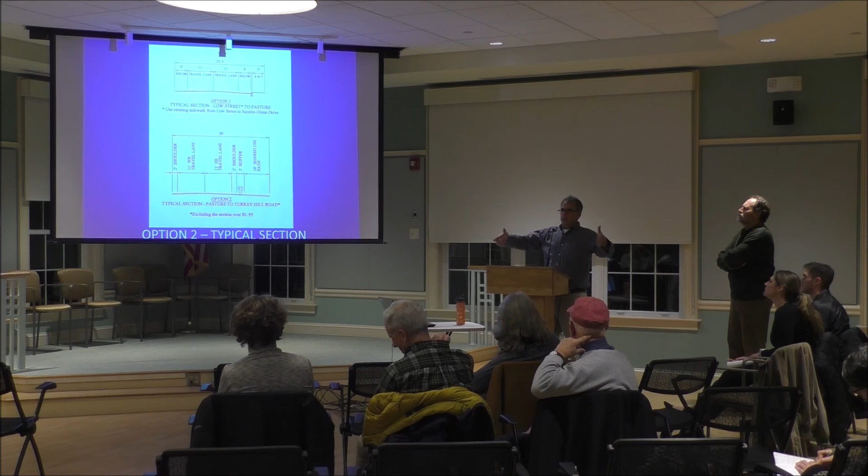Yeah, and that's where we could do a mixed-use gravel path, inexpensive, behind anything to do with the roadway, just get it out of the way. So the section by the pasture — we could have a traditional sidewalk here, and then put that path back here.

That's what I was joking about, not being reality. The reality part I meant is it's not in the right of way, so then you have to buy land. If the right of way is there, your idea of separating and keeping it way out of the way has to be somewhere here, but that's where the ditch is. So we can move the ditch onto the private property owners, but we're taking land away from them. The bottom line is that whatever we push out, someone's gonna have to pay for something.

Land — allow a private landowner to allow us to do it. For a short run, can't you just cross the street? I mean, we've seen that in neighborhoods, right? There's a sidewalk on one side and it stops, and you cross the street, and then there's a sidewalk on the other side. Yeah, I mean, obviously ideally you don't wanna do a switch over halfway.

Mid-block crosswalks are dangerous, but that shouldn't prevent us from looking into it. At the end of the day, wherever you put it, it's gonna be extra wide, and that's our challenge. But we can look at that, and that's all part of what Jim was saying — try to widen the road, keep everything separate, no curb, no drainage, let's make it happen. Yeah, we can look at that. It's the other sections here where we can't do that idea.

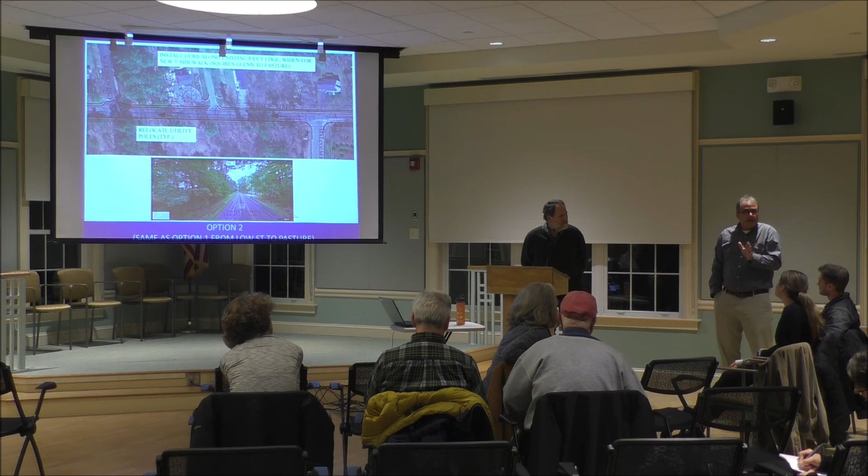It's a new issue, speaking of Google and GPS - I just sponsored sending it back to TSAC because it's not acceptable to the residents of Turkey Hill. I sit in the meetings, but I'm not following it absolutely to the T, because I don't know when Mass Highway got notified and when they didn't. We're going to reopen it again. You should, go for it. For this and other reasons.

We talk about safety, trucks don't belong on there, that kind of stuff. But that's what's going on, so we reopened it, I don't know where it's going to go. Sometimes we don't have control - if Google Maps sends them down there, and the trucker's going to go down there, you can't have a police guy turn them around once they get there. You give them a ticket, the next guy is going to be a brand new guy or gal, a different company, and then it just continues.